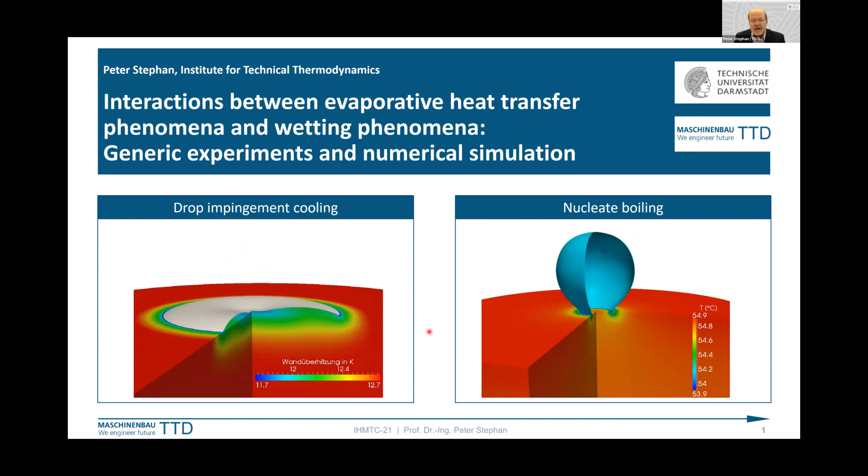You already mentioned the title. The title is written here, and what you see here below are two examples for wetting and de-wetting phenomena in combination with heat transfer. This here is drop impingement cooling, and this here is nucleate boiling. Both videos show numerical simulations, results of numerical simulations. And with the next slide, I would like to show what they have in common. They have in common that here during the spreading and receding meniscus contact line, as well as here, you have this moving three-phase contact line on a superheated wall.

Superheated means superheated against the saturation temperature in the gas phase, in the vapor phase. So you have evaporation here, and at the same time, you have a moving liquid vapor interface at a hot wall. And the question now is, what about the conjugate heat transfer between the hot wall, transient, of course, transient conjugate heat transfer, and the two-phase liquid, and the phase change, so the evaporation. What is the evaporation rate, and how does the evaporation rate depend on the movement of this contact line here in the different situations, the situation of wetting and the situation of de-wetting?

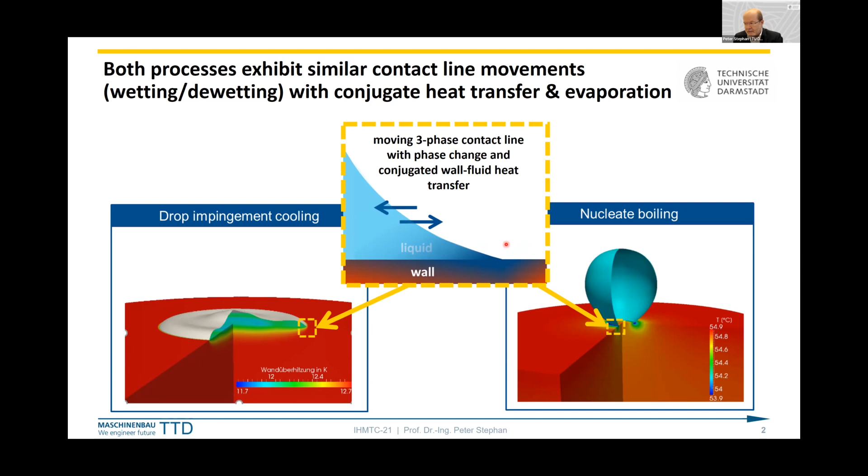Now, the contents of my talk. First, I will give a short summary about the state of the art. I will briefly remind all of you about the knowledge of interactions of heat transfer and wetting and de-wetting situations, the major influencing aspects, and the major research questions.

Then I will go into a second part of the presentation where I present two generic experimental setups. They both have in common the heater device, but they are quite different by means of the application behind it. The first experiment is a nucleate boiling experiment, and the second is a drop impingement experiment onto a superheated wall, including evaporation.

I will also explain the numerical modeling approach that was developed in parallel, to learn from both the generic experiments with high spatial and temporal resolution, as well as from the numerical simulations. I will present results in an exemplary manner on different length scales, a little for nucleate boiling, but basically, due to time reasons, for the drop impingement experiment and numerical simulation.

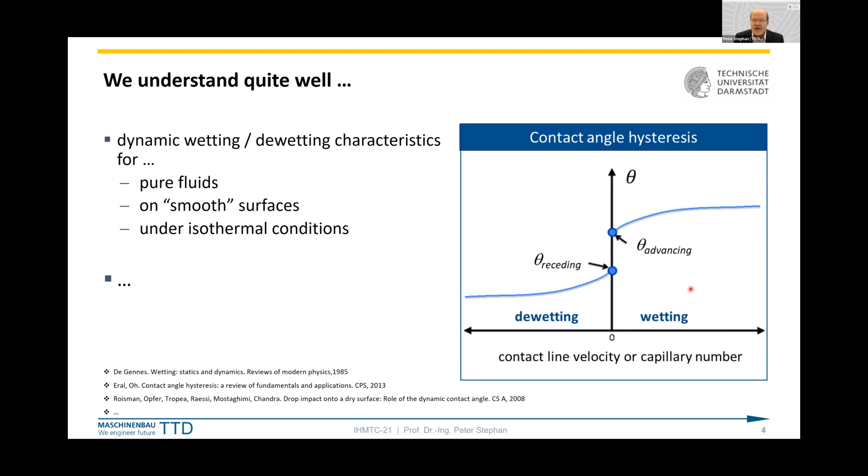But basically, this is valid only for smooth surfaces. In experiments, or in the real world, we never have perfectly smooth surfaces—that's why we can also have contact angle hysteresis. This is quite well understood.

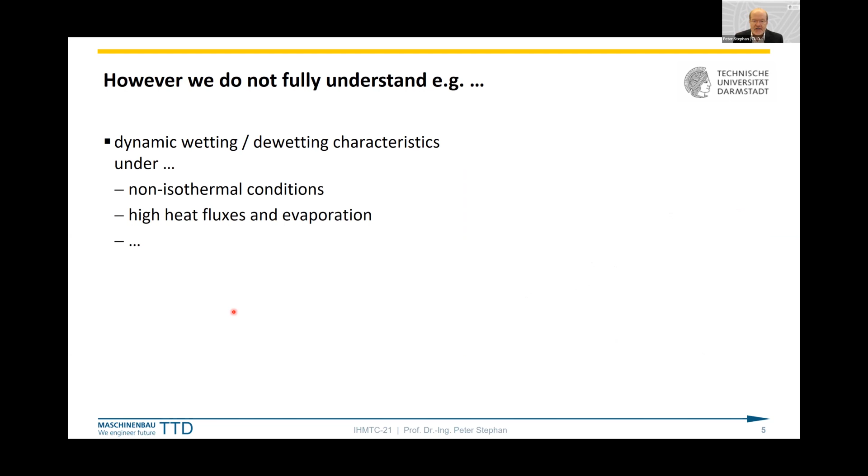However, we do not fully understand dynamic wetting and de-wetting characteristics under non-isothermal conditions with high heat fluxes and high evaporation rates. As an example, I show you results published in 2012 together with colleagues: Raj, Kunkelmann, Stephan, Plawsky from the United States, Jungwoo Kim, and myself.

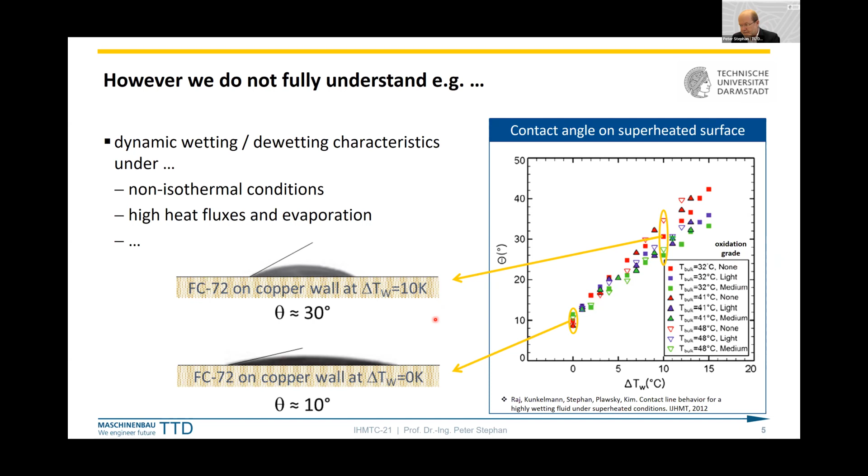What we also do not fully understand, apart from that, is the dynamic wetting and de-wetting characteristics for complex fluids and complex or structured surfaces. This is not the contents of my talk today, but as mentioned in the introduction, I'm also head of a collaborative research center here in Darmstadt, financed by the German Science Foundation, called Interaction Between Transport and Wetting Processes, where we investigate numerically and experimentally complex fluids and complex surfaces.

Such a collaborative research center means approximately almost 20 PhD students are working in this field, together from different disciplines—material science, chemistry, mechanical engineering, mathematics, etc.

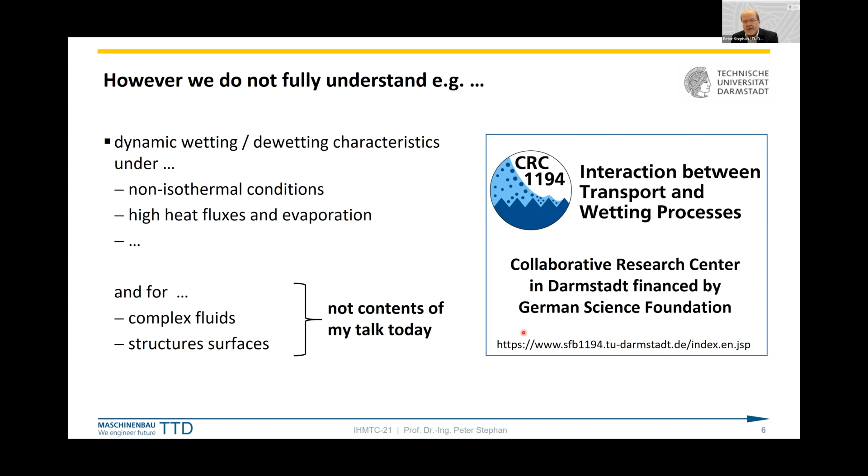What are the major influencing effects on two-phase or evaporative heat transfer? In the past about 6 years, an ESA International Topical Team, a bunch of European and international colleagues, received small financial funding to develop a roadmap for two-phase evaporative heat transfer for the European Space Agency. The aim was to show scientific questions they might address, including in zero-G experiments in space. We categorized the major influencing aspects into three categories: the fluid alone, the wall alone, and the interaction between fluid and wall.

Considering only the fluid, the two-phase fluid of liquid and gas, we address transient conduction, convection, liquid-vapor interface dynamics like bubble or droplet dynamics and mergers such as coalescence, and liquid-vapor interfacial instability. In case of multi-component fluids, we address Marangoni effects and multi-component gas atmosphere additives, and so on.

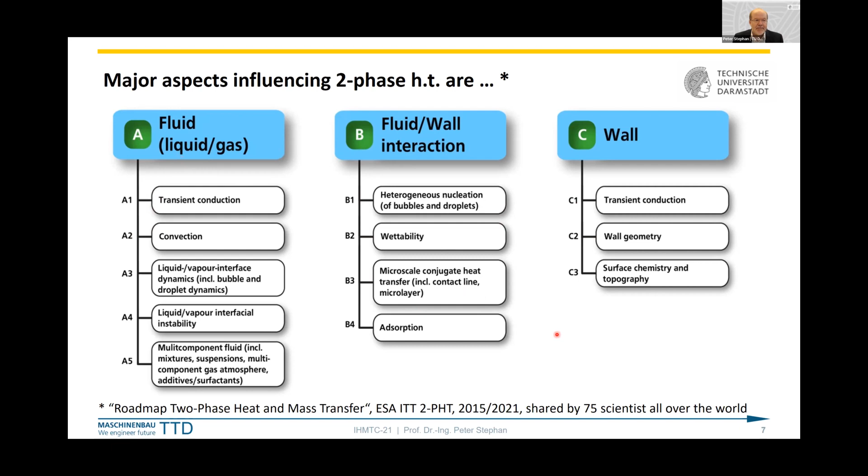For all these subcategories, A1 to A5 up to C1 to C3, we developed scientific questions—a total of 31 questions across these categories. I'll give only 3 examples here.

In the fluid category, we posed scientific question A3, on liquid-vapor interface dynamics. We wanted our joint research to answer: what are the effects of coalescence or breakup on local heat and mass transfer on the fluid side?

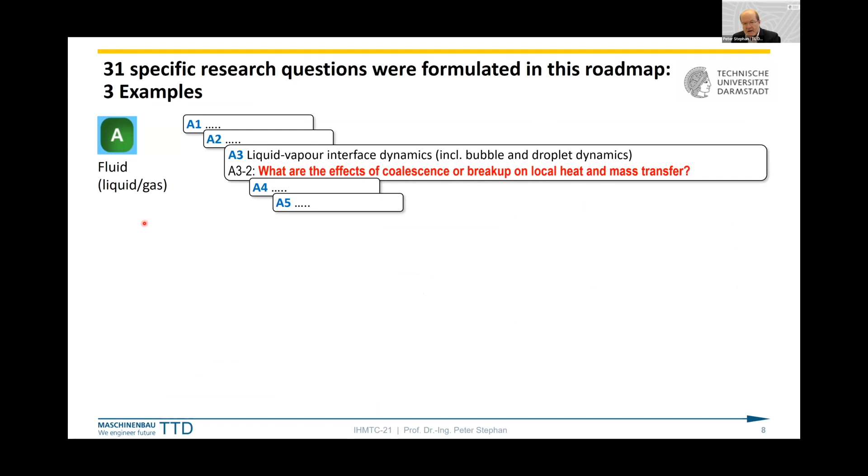For the fluid-wall interaction, in the category of microscale conjugate heat transfer—contact line or microlayer heat transfer—we posed the question: how does local heat transfer influence wetting characteristics, and vice versa? Heat transfer influences wetting characteristics, but wetting characteristics also influence heat transfer.

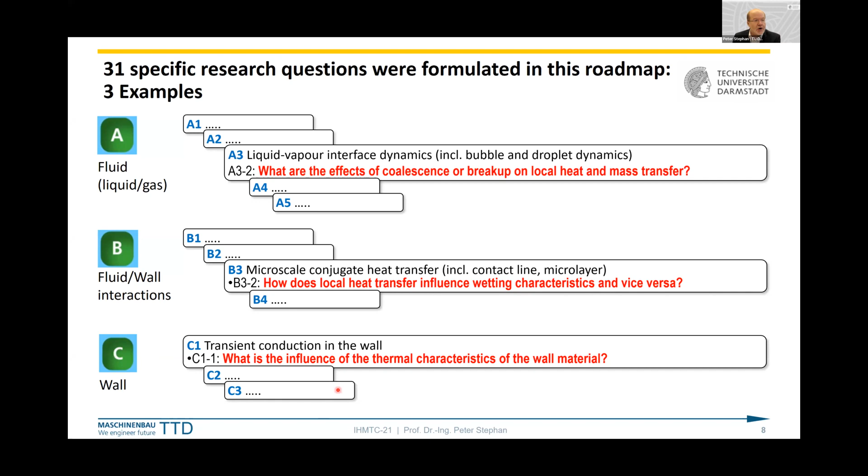In category C, for C1, transient heat conduction, we posed the question: what is the influence of the thermal characteristics of the wall material, for example the thermal diffusivity of the wall? We collected a number of questions, and with our joint research we want to answer them.

This brings me to the second part of my talk: the generic experimental setups I will introduce, and the numerical modeling approach.

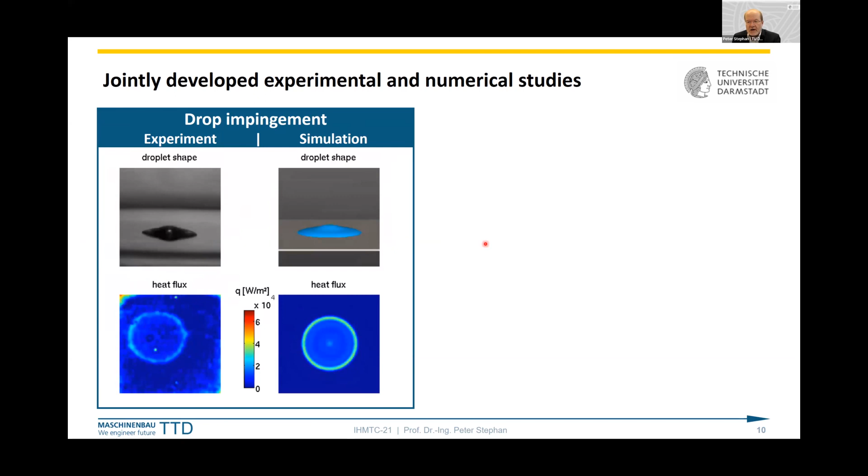Additionally, together with an international team, we developed a boiling experiment for the International Space Station. This experiment flew on the ISS last year, and I can present some results from it. Meanwhile, the experiment has come back to Earth.

It's in our lab now again, and we hope to bring it up next year again into space with other kinds of fluids, other kinds of wall materials, etc.

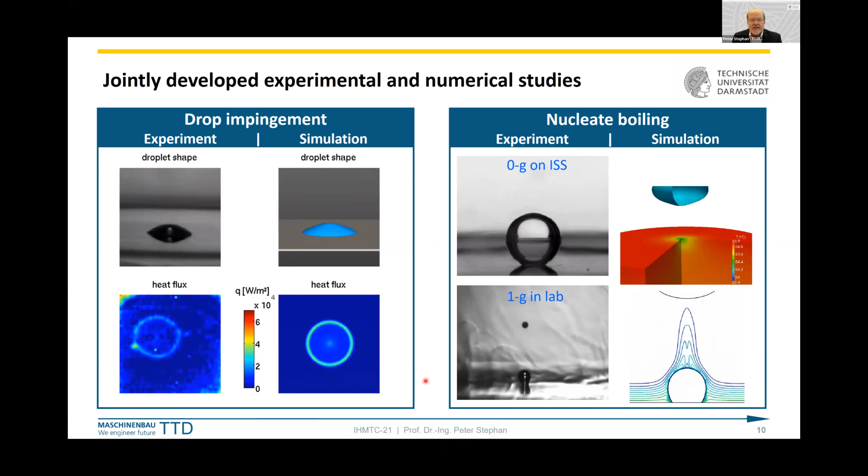Now let me present the basic idea of these two experiments. I'll start with the nucleate boiling experiment. We have one setup in the lab which we use for parabolic flights, and one setup developed by an international team for the International Space Station. The basic idea in these two versions of the experiment is the same: we have a infrared-transparent heater, which I'll show two slides from now.

On this transparent heater we can apply heat, and we can have a short pulse of a laser to nucleate a bubble here. Once the bubble is nucleated, it grows. Either we don't have a flow, which gives us pool boiling, or we have a flow, which gives us a flow boiling situation.

We have a high-speed camera to observe the shape of the bubble, and a microthermocouple rack with different tips, very small microthermocouples of less than 50 micrometer diameter, to measure the temperature at different positions in the two-phase fluid — whether the bubble is growing inside the bubble or outside it in the thermal boundary layer.

For the International Space Station, the experiment has to be very small, so it fits into this tiny box, while in the lab the experiment uses several square or cubic meters of space. Here it's simply in a small box.

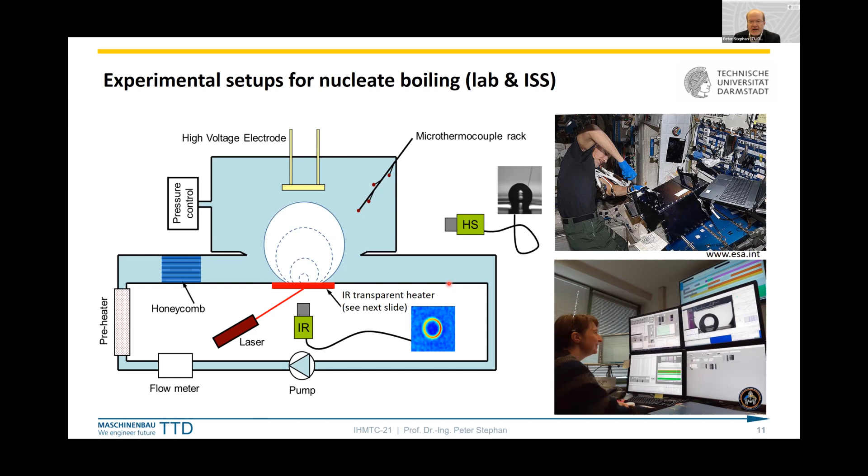The basic idea of this heater concept, with the two cameras, infrared camera and high-speed camera, is the same in our drop impingement cooling experiment. In that experiment, we developed a test cell that you can see here.

Inside this test cell we can control the vapor atmosphere with the pressure, so it's a pure vapor atmosphere in this test cell. We have a small droplet generator which can create single droplets, and these droplets fall onto the heated infrared-transparent plate. We can have either single droplets hitting here, or multiple droplets one after another, or also in parallel. Today I'll only present single drop impingement on this heated plate.

We use a high-speed black and white camera with backlight illumination, so we can observe with very high temporal and spatial resolution — 1000 Hertz, and 14 micrometer per pixel — the dynamics of the drop impingement event. We have this infrared-transparent heater, and with the same time resolution, a high-speed infrared camera, so we can observe the temperature profile.

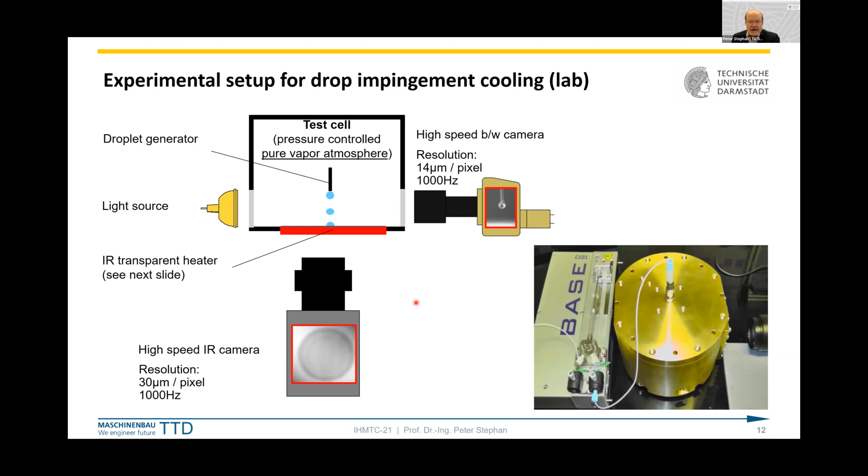On the next slide we'll see this specific heater, which is basically almost identical for both experiments. Here you can see the heater we developed for the International Space Station experiment, though as I said it's basically the same in all the experiments. The base of the heater consists of a calcium fluoride substrate, which is fully infrared transparent, so we can view through this glass plate with the high-speed infrared camera.

In the nucleate boiling experiment, we produce with a laser beam a small artificial cavity inside this calcium fluoride glass, about 20 micrometers in diameter and 100 micrometers deep. In the drop impingement experiment, of course, we don't have this nucleation site. Interestingly, this calcium fluoride glass has very similar thermal diffusivity to, for example, stainless steel, so its thermal behavior is very similar to that of stainless steel.

We cover this infrared-transparent glass with a chromium nitride layer a little less than half a micrometer thick, 400 nanometers, which gives it an emissivity of essentially 1. So when we observe with the infrared camera — fully calibrated, pixel-wise, in situ calibrated — we observe a temperature profile.

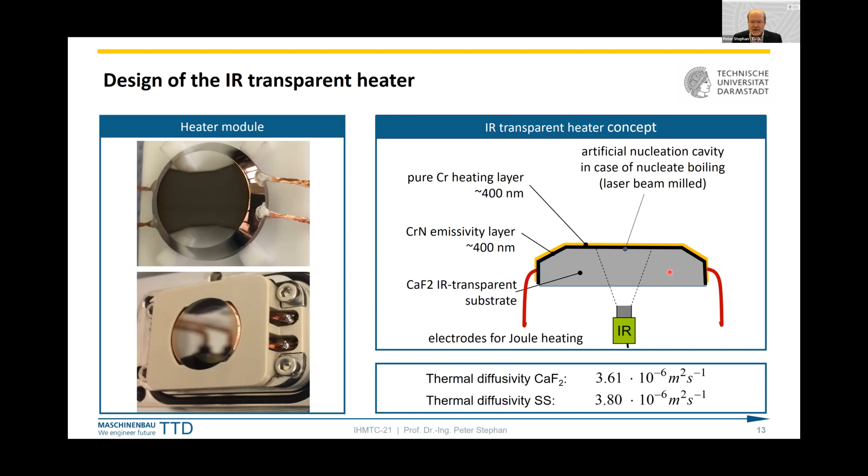What you see here are the electrodes, 4 in total, 2 on each side of the heater, contacted on the pure chromium layer. We have the heating system on top of this infrared transparent glass, and by applying voltage through these electrodes we get Joule heating, giving us heating and a temperature profile measurement directly at the heater surface.

From this infrared camera, with the in situ calibration and pixel-wise calibration, which is very important for accurate measurement, we get at each time step a 2D profile of the temperature across the surface in the X and Y directions.

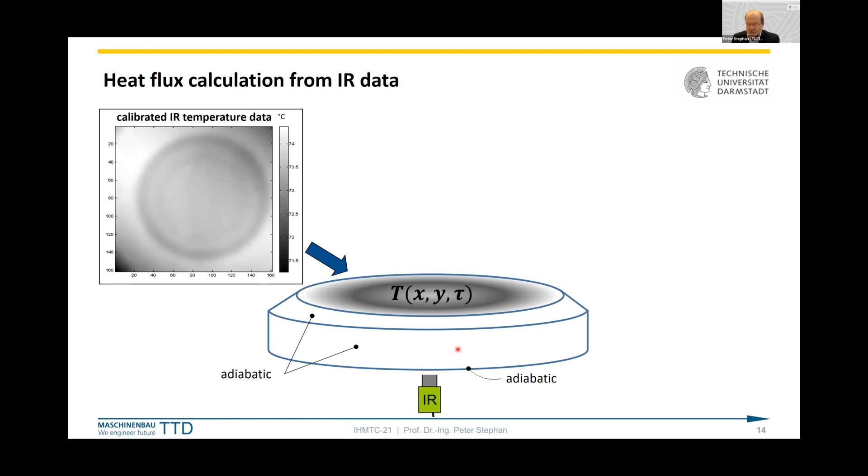The boundaries of this infrared transparent glass are very well isolated, in a very low pressure atmosphere underneath, so they are considered adiabatic. With this assumption, from the transient 2D temperature profile we can numerically compute the 3D temperature profile in the entire heater system, including the Joule heating in the chromium layer on top. From this infrared temperature data we also get the transient 2D heat flux profile at the interface of the solid heater, so we have both temperature and heat flux profiles.

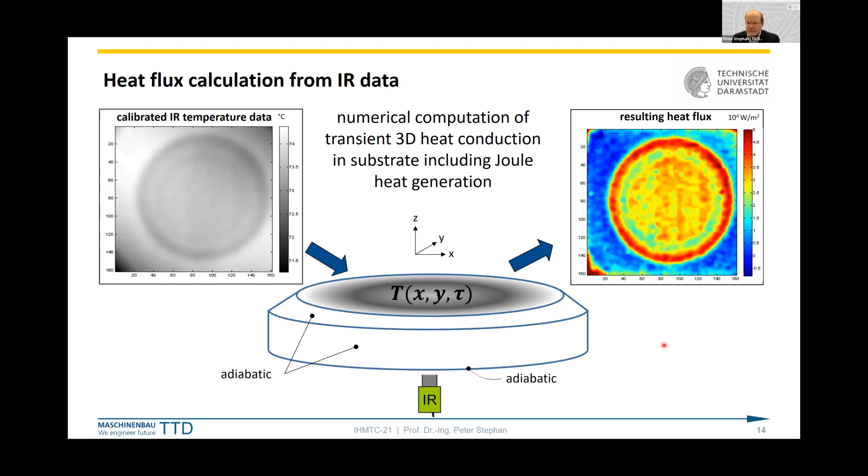Now let me talk, before presenting results, about the basic model for numerical simulation. The basic model is a little different for the nucleate boiling situation compared to impingement cooling, but the codes are almost identical. We subdivide our region of interest, either the nucleate boiling test cell or the drop impingement test cell, into a more macroscopic part and a contact line part.

For the contact line part we use a subgrid dynamic contact line model, because at such a small scale it can't be included into the overall model due to computational time. In this subgrid model we model this small area including evaporation, considering mass, momentum, and energy balances, including adhesion forces by means of a disjoining pressure, which reduces the volatility of the fluid. Then we have flow from the bulk towards the contact line and evaporation there.

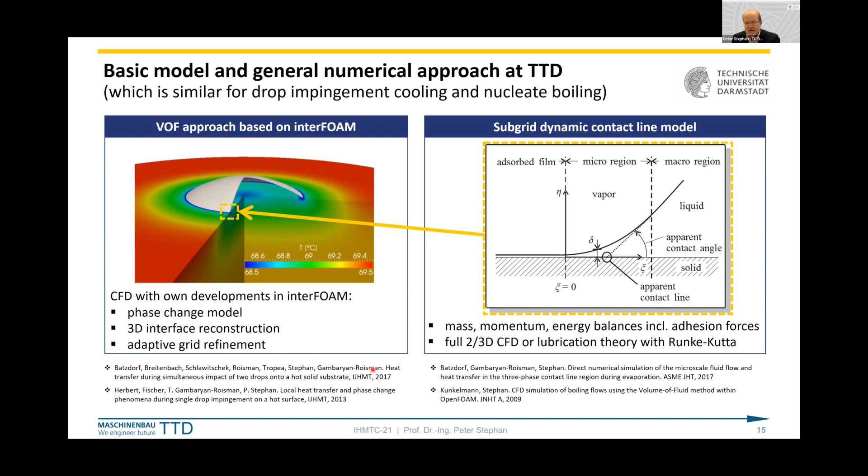The wall can also move, so there's relative motion between the liquid-vapor interface and the wall, giving either an advancing or receding contact line. This solution is then parameterized and matched into the larger scale model, a CFD simulation using OpenFOAM, specifically the interFoam version. We included our own phase change model and 3D interface reconstruction, further developed, and we use adaptive grid refinement since we need a very fine grid close to the contact line and a much coarser grid outside this region. This is the basis of the model.

Now let me present exemplary results on different length scales, first on the pure contact line scale from the dynamic contact line model alone. What I plot here is the contact line velocity: 0 means static contact line, positive values mean advancing or wetting, and negative values mean de-wetting or receding. We see the apparent contact angle from this microscale model at different wall superheats, from 1 Kelvin up to 20 Kelvin. The contact angle increases in the advancing, wetting situation.

If you de-wet the surface, the contact angle goes towards 0, very small. And if you increase the superheat, as we saw earlier in this talk from a publication about 10 years ago, the contact angle increases with increasing superheat. We can use this as a parameter study and include it in the larger scale model. What we also put as a parameter table into the larger scale model is the heat transferred per contact line length.

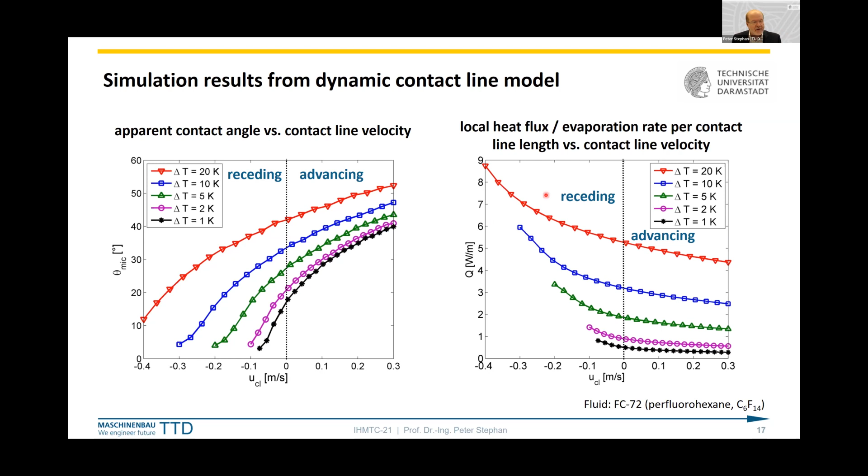You see here that in the advancing situation for positive contact line velocities, so wetting situations, there is less heat per contact line length transported than in the receding situation. This is quite obvious because in the receding situation you also have a smaller contact angle, so a thinner film, and a thinner film means higher heat transfer.

Now this shows results from the nucleate boiling simulation, including the macroscopic simulation view, but this also includes the contact line model, which is used as a subscale model in the larger model. We can distinguish three periodic phases.

The first phase is the receding contact line, excuse me, so the de-wetting situation. After nucleation, the bubble is growing and it de-wets the wall, so we have a receding contact line situation. Next we have a re-wetting phase, an advancing contact angle just before the bubble is detaching, so a re-wetting situation at the wall, an advancing contact line.

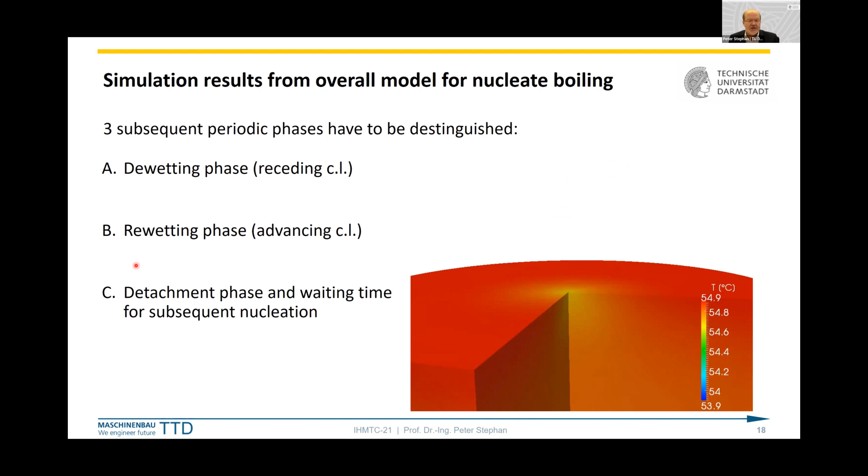Then we have subsequently a detachment phase and a waiting time for the subsequent nucleation. Subsequent nucleation starts when the local wall superheat at the nucleation site is high enough to generate the next bubble. Then we repeat in periodic manner these three phases: de-wetting (receding contact line), re-wetting (advancing contact line), and then no contact line at the wall, just waiting time for the next nucleation.

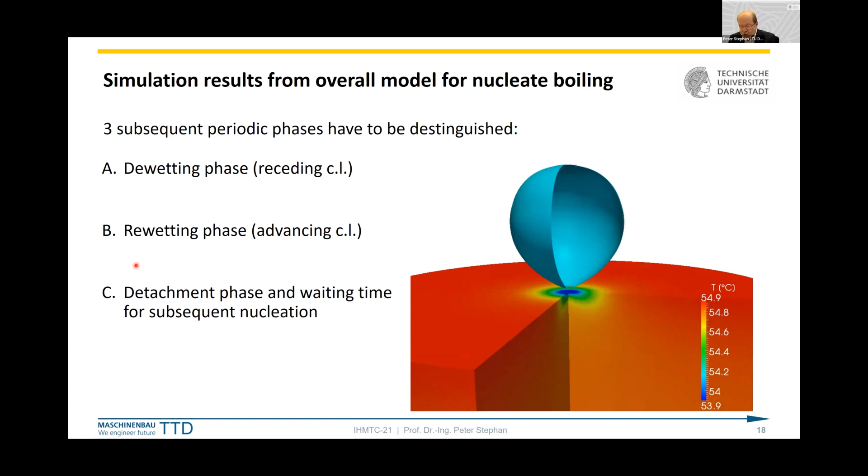On the next slide we see a very similar video, but now for the drop impingement case. Also here we can distinguish three subsequent periodic phases, when the drop is approaching the superheated wall.

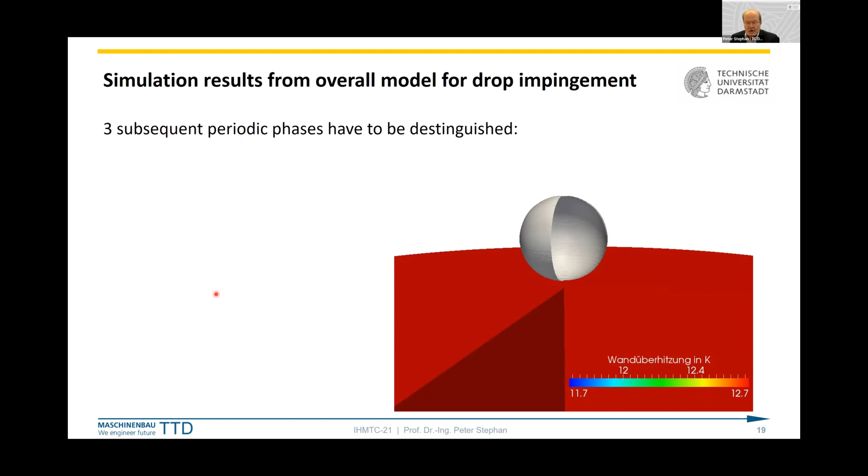Then the drop is hitting the wall, and first we have an advancing contact line, the drop is wetting, so we have a wetting phase. This phase is inertia driven because you have inertia from the velocity of the drop that is hitting the wall.

The next phase is the de-wetting phase. This is surface tension dominated, surface tension driven, because after the drop has spread to maximum radius, it's shrinking again. The base radius is shrinking again because surface tension tries to put the droplet into an equilibrium position.

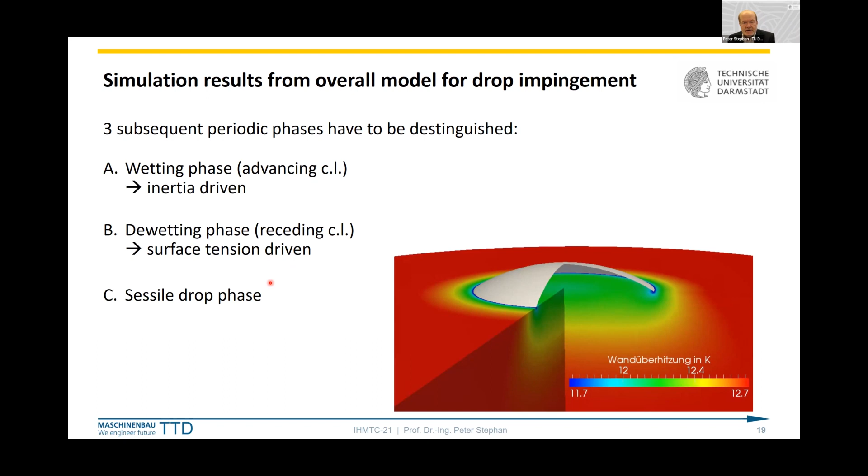Then after reaching this equilibrium position, due to first inertia and then surface tension driven effects, you might have small oscillations, but then you have basically a sessile droplet that is slowly evaporating further. We see this also nicely in the next slide.

We see the drop come down, and then two plots which I will explain. The blue line is the mean temperature profile in this area, and the green line is the mean heat flux profile. When the drop hits the wall at this position and time, we see the mean wall temperature, averaged over this field of view.

We see that the drop is cooling the wall, so the temperature is decreasing, and the heat flux is increasing due to this cooling effect of the impinging drop. We can observe this quite nicely. This window here shows only a part of this window.

You also see quite nicely a ring-shaped area with low temperature or high heat flux, close to the contact line. So at the contact line we have the highest cooling rate, the minimum temperature, or the maximum heat flux near the contact line.

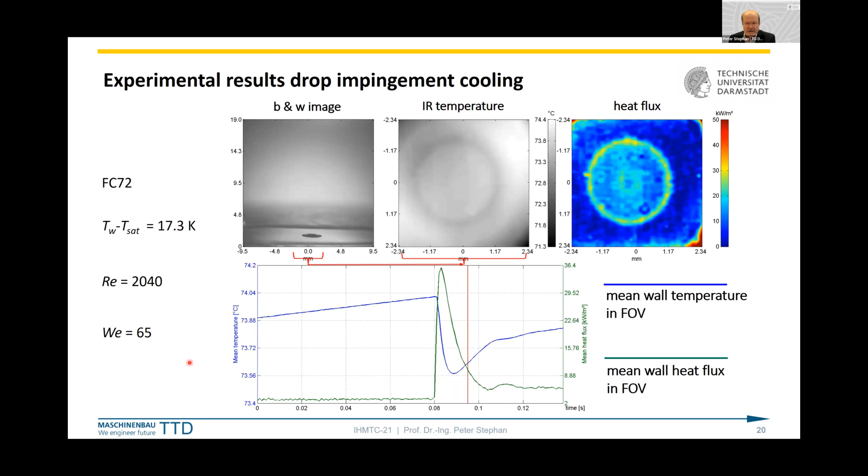Once again, to finish the slide, here you see the cooling effect and the increasing local heat flux. Now, if we compare these experimental values with our numerical simulations, it fits quite nicely, and we can distinguish again these three phases very nicely. The first phase was the initial spreading phase due to inertia.

This is the radial position of the contact line versus time in milliseconds. We see the droplet reaches a maximum base radius at this radial position, about 1.6 millimeters in this case.

Then we have the receding contact line phase due to surface tension, and then the sessile droplet slowly evaporating. We see the error bars, the uncertainties from the experiments. We repeated the experiment several times, and within these error bars we see some small experimental variations. This is the result, the red line of our numerical simulation, so it fits very nicely, and we can distinguish these three phases.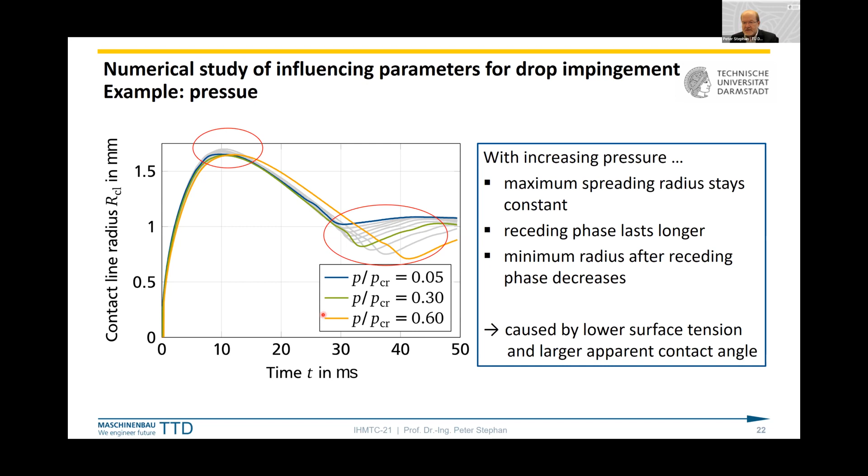Now we compared in this drop impingement experiment the heat transfer. Of course, in the experiment, we can measure only the overall heat transfer on the entire wall. That's what we did here, and we compared that - these are the stars. The blue line here is the numerical values, and they fit quite nicely.

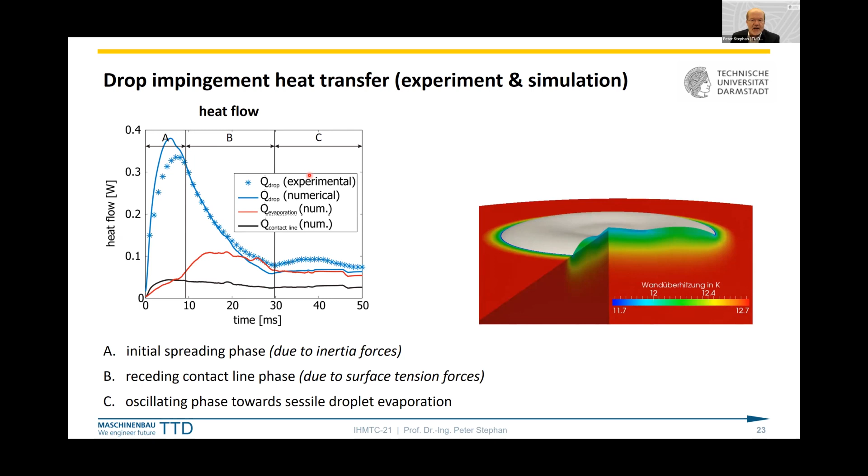But of course, we can also see in the different phases where the heat is going. In the experiment, we can't distinguish what is evaporation versus pure single phase convection. But in the numerical simulation, we can distinguish between these different paths of heat transfer. So after the validation that the overall heat transfer of the experiment fits very nicely to the simulation, we can trust the numerical simulation and see in detail what happens.

In the advancing contact line phase, the inertia-driven phase, the drop is hitting the hot wall, and we have a flow inside the drop going from the bulk towards the contact line. This flow presses down the thermal boundary layer because we have a hot wall. In this phase, the thermal boundary layer is heated up quite a lot from the hot wall, and the liquid pushes it down towards the wall.

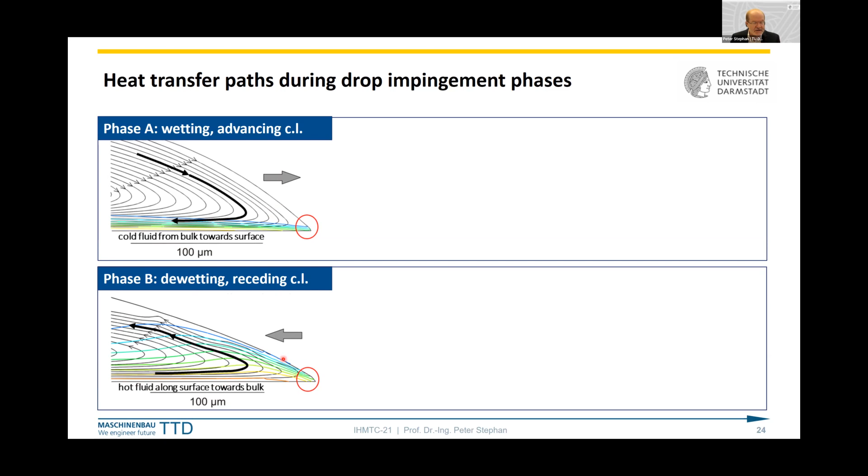Now, when we change to the surface tension driven phase, or the de-wetting phase, or the receding contact line, the hot fluid from the thermal boundary layer, because we have a flow in the opposite direction, is transported towards the liquid vapor interface. So the liquid vapor interface typically has the temperature of the original impinged droplet, while here it gets a lot of heat, and temperature increases at the interface due to this flow from the thermal boundary layer.

If we look into a Sankey diagram of how the heat is transported, we see that in the first phase, the wetting phase, the heat coming from the wall is basically going into latent heat, heating up the thermal boundary layer. While in the second phase, the fluid is already quite hot, but now the hot liquid is transported towards the interface, and that's why we see increased evaporation.

So here, the heat transport mechanism is basically purely convective heat transfer from the hot wall into the pure liquid phase, while in this de-wetting phase, we start to have a high evaporation rate. We also see what is directly transported through our subgrid model of the contact line, which is also increasing in the de-wetting phase because due to these velocities and the thinner film, we have higher heat transport in the contact line model. So quite some different situations in these two cases.

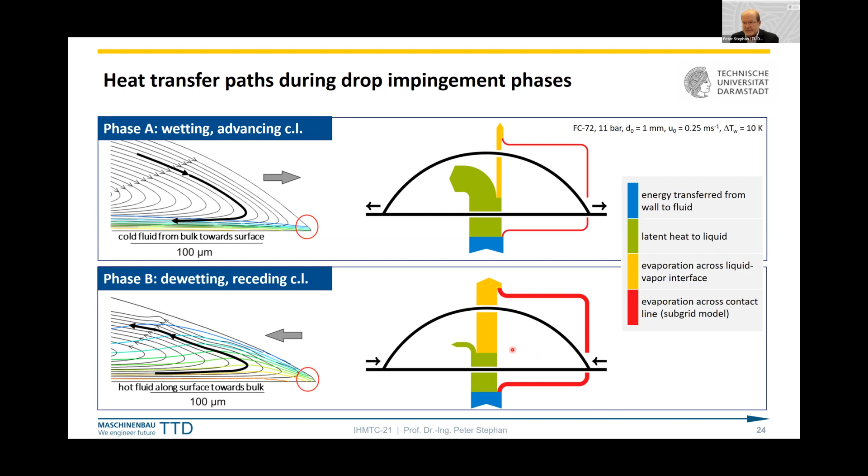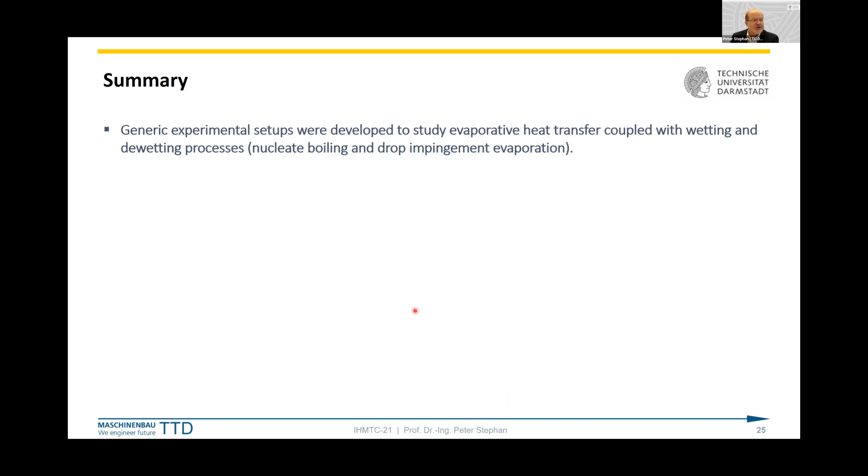Now let me give a short summary of my talk. First of all, we developed different generic experimental setups to study evaporative heat transfer for single drop impingement, also multiple drop impingement, though I didn't show that here, and nucleate boiling. Both have wetting and de-wetting processes, which is a more general feature across these different experiments. Then we developed in parallel numerical models, including a subgrid model for the dynamic contact line heat transfer.

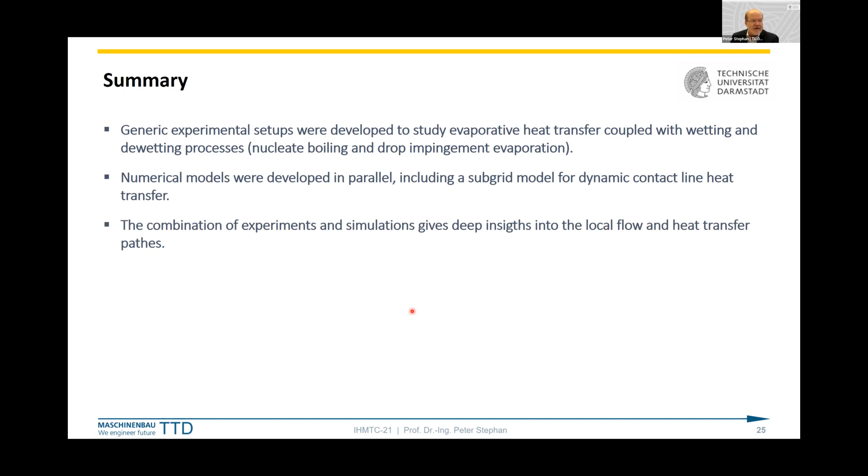The combination of experiments and simulations gives quite deep insight into the local flow and heat transfer paths. I showed you the different paths in the wetting phase and de-wetting phase. In the wetting phase, it's basically convective heat transfer, and in the de-wetting phase, the evaporation rate increases quite a lot. These are, among others, the two results that can be withdrawn from these studies.

During the wetting phase, the advancing contact line convective heat transfer mechanism is dominant. Heat from the hot wall is transported into the liquid boundary layer and accumulates there, thereby increasing the sensible heat in the liquid. The evaporation rate is rather low in the wetting phase.

During the de-wetting phase, with the receding contact line, the evaporative heat transfer mechanism is dominant. The hot liquid boundary layer spreads towards the liquid-vapor interface. As a result, the evaporation rate increases, thereby rejecting the accumulated heat from the liquid into the vapor phase.

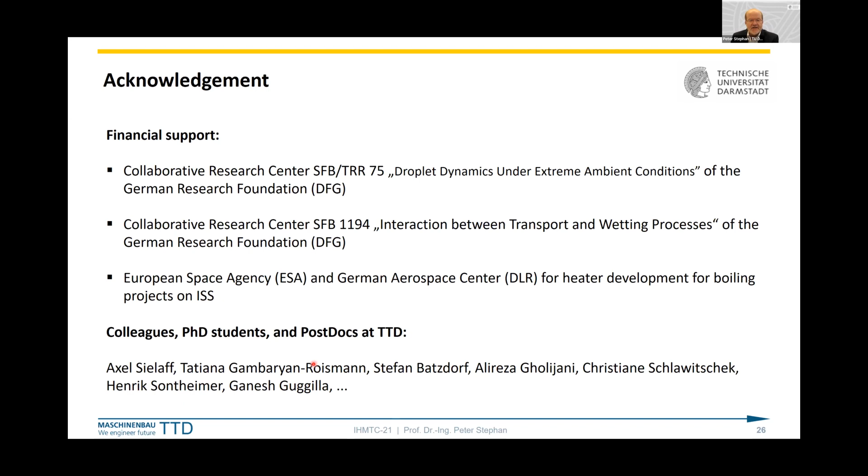Thank you very much, Professor Stephan. This was a really very nice talk. You have first stimulated us with the open questions, and then you have linked up nucleate boiling as well as droplet impingement cooling through experiments and numerics.

I can see that some questions are there in the Q&A, so I'll recite them for you. Mr. Debartha from IIT Kanpur is asking, in the nucleate boiling experimental setup, what was the role of the electrode shown in the schematic?